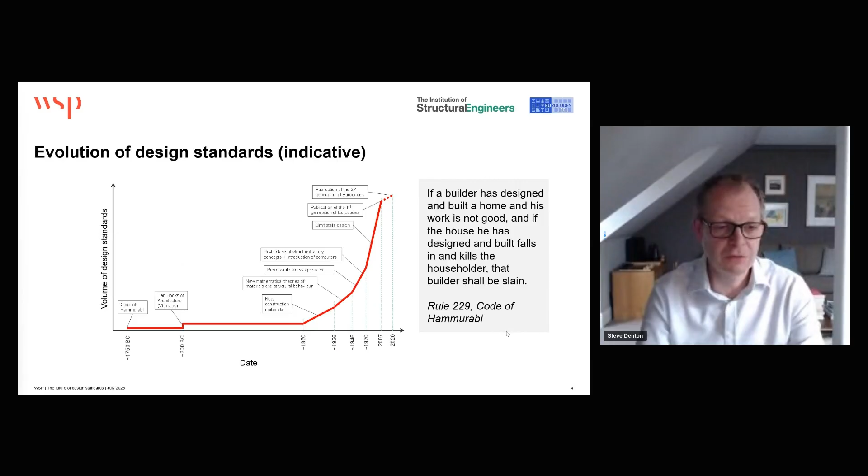It always fascinates me when we look back over the years that for people involved in standardization work, it's intriguing to see that even 4,000 years ago, they were writing performance-based requirements. And for those involved in contract negotiations, it's interesting that even in those days they wrote contracts with pain-gain mechanisms, albeit they focused on the pain side back then.

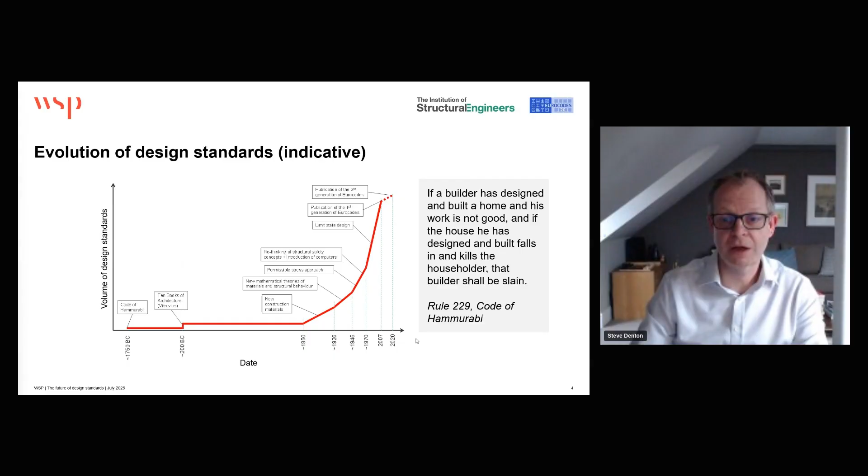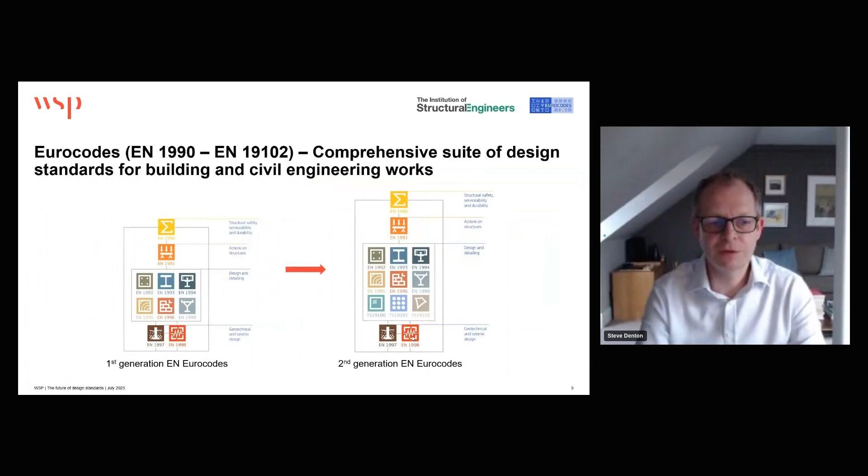But what I'm going to focus on today, and the examples I'm going to draw, are more from the Eurocodes. I'm going to talk specifically about some of the things we've learned and observed through the transition and development of the second generation Eurocodes, work I've been involved in for many, many years, and that I've been leading since 2013 as chair of CEN TC250.

I always remember, when I think around this topic of simplification, a decision which I drafted at a meeting. I remember sitting in a meeting room in Helsinki overlooking the harbour back in 2010, discussing as CEN TC250, the committee with overall responsibility for the Eurocodes, questions around simplification in standards. So while this topic has been meaningful in the broader debate around standards, it's also been specifically something we've been mindful of in developing the second generation Eurocodes, and we started thinking about what it meant to us as far back as June 2010.

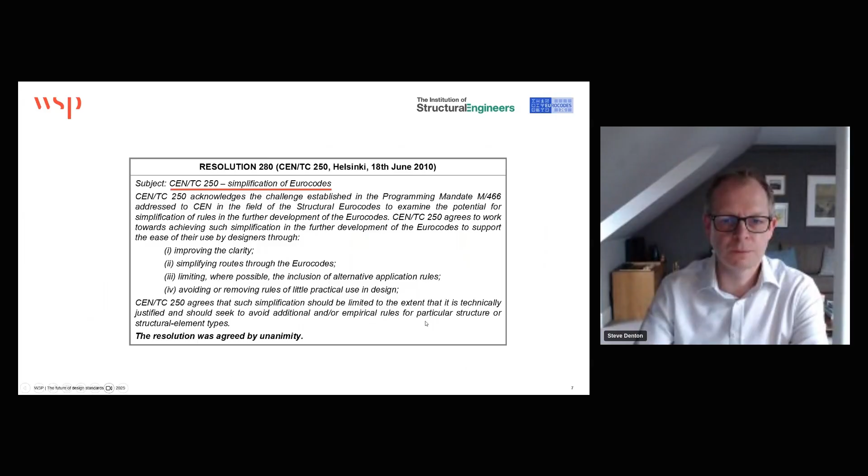Now, if I'm listening to someone speak and listening to their viewpoint, I'm always interested in where their viewpoint is from, where are they coming from. So I thought I'd give you a little bit of my background before we get into the main meat of the presentation.

As Jane said, my day job is as managing director for the Civil Intelligent Infrastructure and Roads units within WSP in the UK. But I actually spend a significant proportion of my time involved directly in projects, and have the opportunity to work on some really exciting and technically extremely complex projects. I combine that role with the work I do leading TC250 and the evolution of the structural Eurocodes, but also being Vice President of the Royal Academy of Engineering, held a visiting chair at the University of Bath for many years, and also worked as an advisor to clients and governments, both domestically and internationally.

And so I've tried to bring all of those different perspectives to the work I've done in leading the development of standards. But central to that, my day job, what I do most of my time, is as a practitioner, and that is the primary perspective that I bring to the standardization work that I do.

So in terms of this talk, I've split it into seven parts, but there's kind of three blocks. The first three parts are really just exploring the concept around standards and simplification and where we've got to, and some observations on the work that I've been doing over recent decades. Then the second block is really looking forward - what are my recommendations for how we should be considering and developing design standards in the future? And then finally, some brief conclusions at the end.

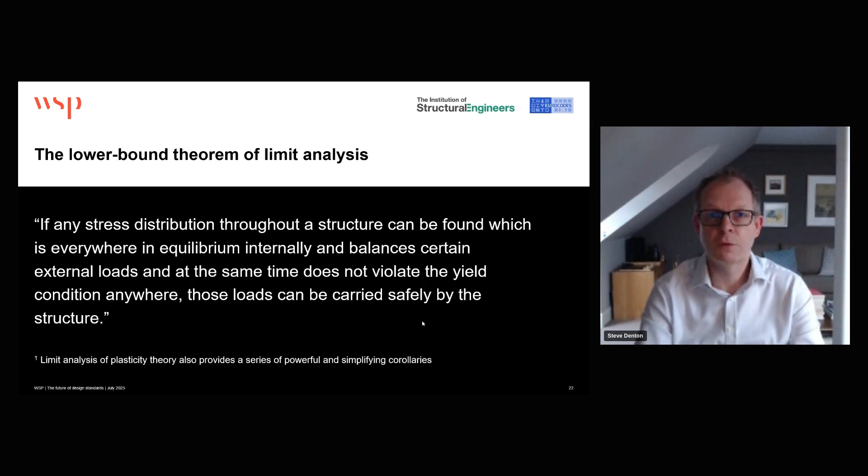But all theorems have or rely upon underlying assumptions. So if we're relying upon this theorem day to day, do we know what those underlying assumptions are? Well, there are four, and at least two of them are really important to know.

The first is that displacements are small, meaning they can be reasonably neglected in the equilibrium equations. So the first is small displacements, and the second is that materials are ductile, or have sufficient deformation capacity, which essentially means the size and position of the yield surface is fixed.

The other two assumptions can often apply, but probably we don't need to worry about them so much: the yield surface being convex, and a thing called the normality condition applying. But those first two should absolutely be in our consciousness - that displacements are small and materials are ductile.

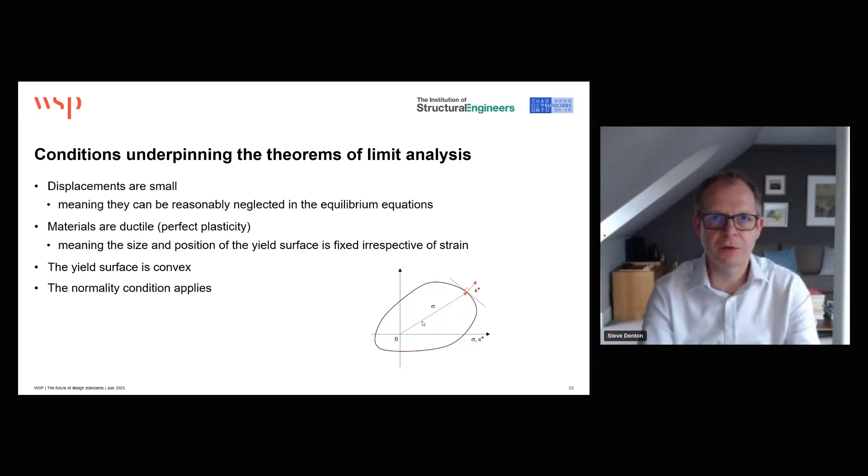So if I'm talking about standards and simplification, why have I taken this detour into this basic fundamental structural theory? Let me demonstrate why.

I've drawn in this talk, and I will again, a number of examples from the second generation draft of EN 1992, the standard for the design of concrete structures. And I've just extracted a clause from it here.

And this clause says the effects of restrained imposed deformations may be neglected at ultimate limit state. That's really convenient. Yeah, that's really convenient.

Now, what do we know about restrained imposed deformations? It's that they generate self-equilibrating stress systems. So we can neglect them at ultimate limit state according to the lower bound theorem of limit analysis.

But you'll see if you read on, this clause says: where it can be demonstrated or has been shown by experience with similar structures that - so what are those conditions? Those conditions are, firstly, that there's sufficient deformation capacity or ductility. And the second is that the structure is not sensitive to second order effects caused by large displacements, i.e. that we're looking at a small displacement situation.

So you'll see here that those conditions around being able to neglect the effects of restrained imposed deformations link directly to the assumptions that underpin the lower bound theorem of plasticity or limit analysis. And if those assumptions don't apply, then we have to go elsewhere for much more detailed analysis.

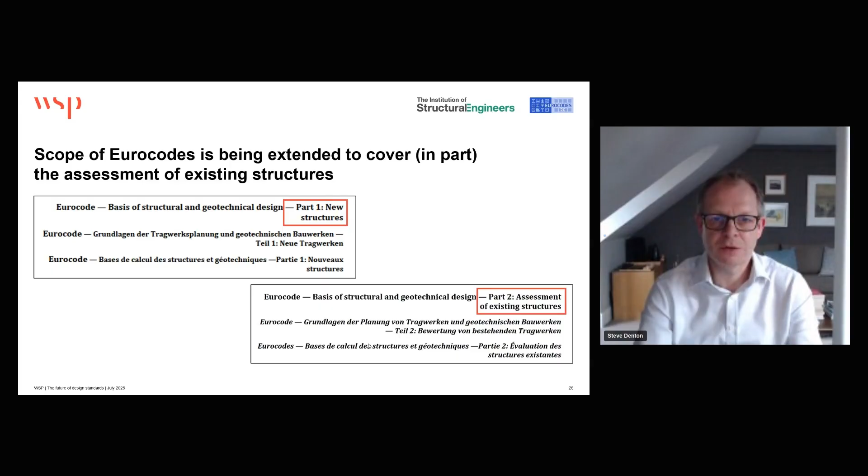These standards are being developed under the responsibility of CEN TC250, which is a committee where we have a series of subcommittees that take responsibility for each of the Eurocode parts, and then a number of horizontal groups and working groups and other groups to oversee the combined effort and try to ensure alignment between the activities at the subcommittee level.

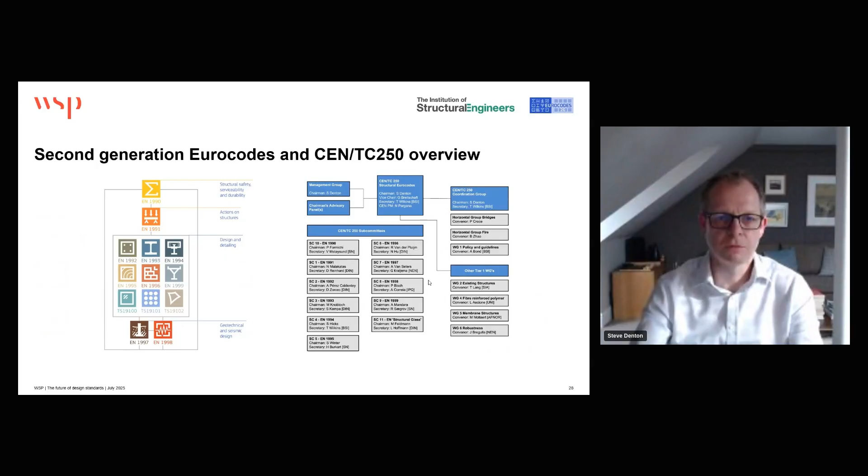An important thing to acknowledge in the development of the Eurocodes is that the Eurocodes are design standards, but they operate as a system in combination with other European product and execution standards. That's really fundamental to the way in which the Eurocodes are developed and their role within this wider system and family of standards.

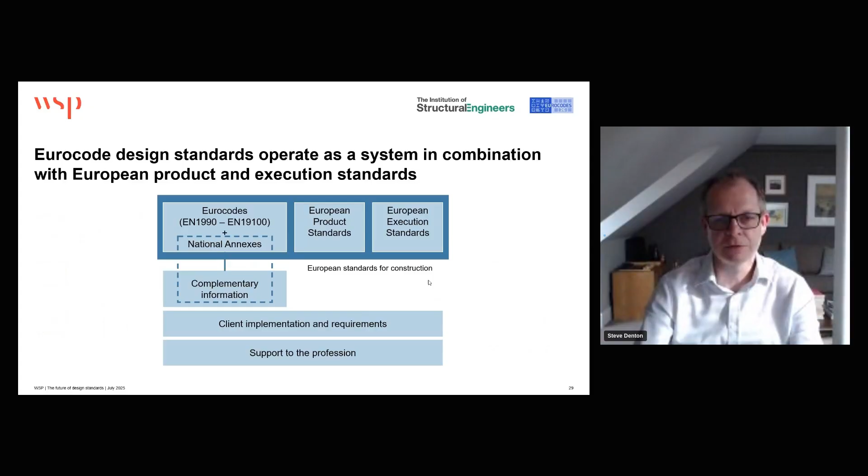Now, in the evolution of the Eurocodes, a really important stimulus, one that opened really important opportunities for us, particularly in relation to funding and support from the European Commission, was a thing called Mandate 515. These days, it would be referred to as a standardization request.

This is when the Commission wrote to CEN, setting out aspirations for how they would like to see the second generation of the Eurocodes developed. As TC250, we brought together around 1,000 experts that contributed to developing our response to that mandate document, setting out how we intended to respond to those changes and aspirations within Mandate M515.

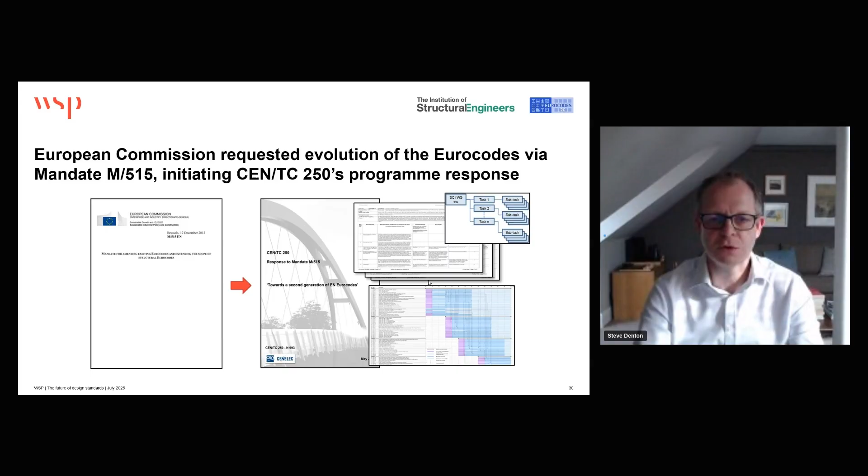One other thing worth sharing about the evolution of the Eurocode is that while Mandate M515 provided a top-down strategic direction, in the early stages we also invited systematic review and feedback from the 34 European countries that are members of CEN, on a clause-by-clause basis, but also on a more holistic basis, for every single one of the 58 Eurocode parts in the first generation.

We received thousands and thousands of comments, and all of those were catalogued and responded to, and those that we chose to act upon were then built into the evolution program for the Eurocodes.

Just to give a flavor of some headlines around the evolution program and its scale, when I last counted, a few months ago, there were 129 active subcommittees, working groups, and task groups within the TC250 family.

I mentioned earlier that the Eurocodes operate in conjunction with other product and execution standards. Those are under the responsibility of other technical committees, so we have 46 active liaisons with other technical committees.

We formed 76 funded international project teams through international competition across the 4 phases of our work program. We've followed all the CEN rules around opportunities for comment through inquiry and formal vote, but we also wanted a more inclusive effort, with more than 300 formal opportunities where we reached out to CEN members and sought comment on preliminary and more detailed drafts of the standards.

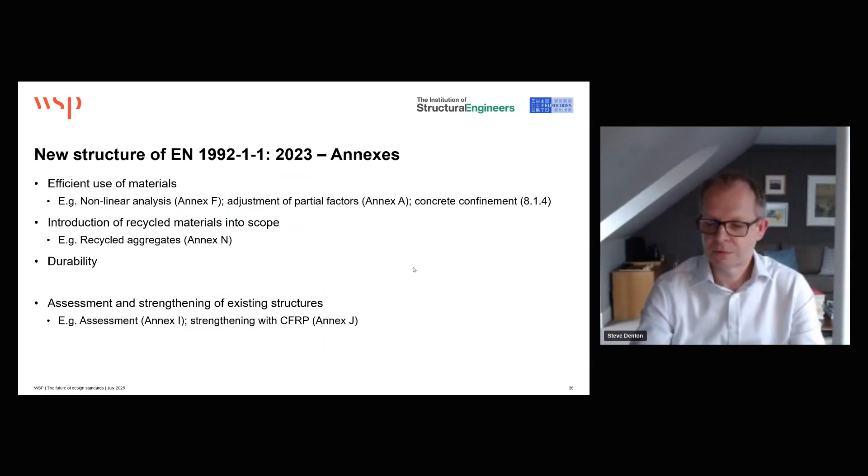Well, again, let's look at a clause. In EN 1992, in the section on methods of analysis, there's this clause around linear elastic analysis, a really convenient and helpful clause: except where specified otherwise. We'll come on to that in a minute. Linear elastic analysis may be carried out for the determination of action effects, assuming uncracked section properties, linear stress-strain relationships, and a mean value of the modulus of elasticity.

That's an incredibly convenient clause. It's particularly convenient that the code says it's fine to use uncracked cross sections, because at the time you're doing your initial analysis of action effects, of load effects, you don't know what reinforcement you've got in your structure. So the fact that you can work based on uncracked cross sections is incredibly useful. It's a really lovely simplification.

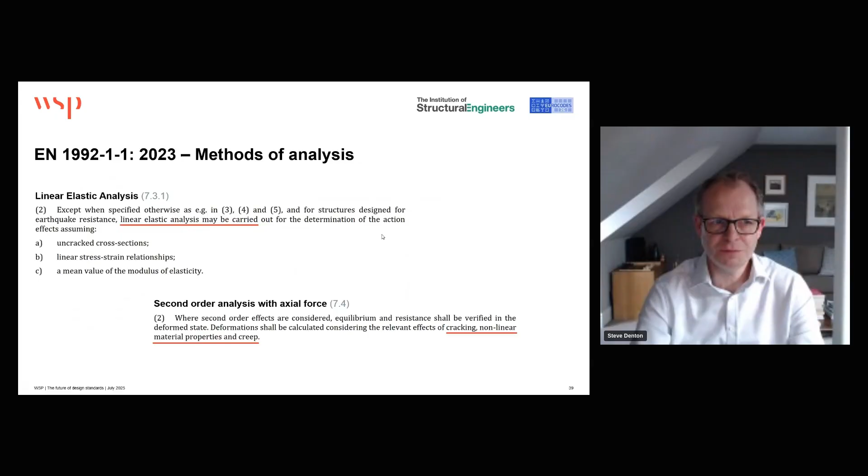So I want to return to this quote: like life in general, our codes seem to get more and more complicated. I imagine when you read that, and if you agreed with it, and those nodding heads that I often see in rooms full of people when I talk about this subject, then you would have seen that word 'complicated' pejoratively, as a negative. And I think we should challenge ourselves on that point.

We're professional engineers. We are responsible for the design and analysis and management of much of our built environment, of our infrastructure. We are equipped to be able to undertake really complex tasks, and we need to sometimes. It's part of what we are capable of doing professionally.

I feel like we should wear our ability to undertake complex analysis, where it's merited, as a mark of honor, not some kind of badge of shame. Why should we feel like we need to simplify or avoid doing complex things where it's appropriate to do it? And where it's relevant and appropriate, don't we need our standards to include the coverage of those things which are just inherently complex, because what we're dealing with is complicated?

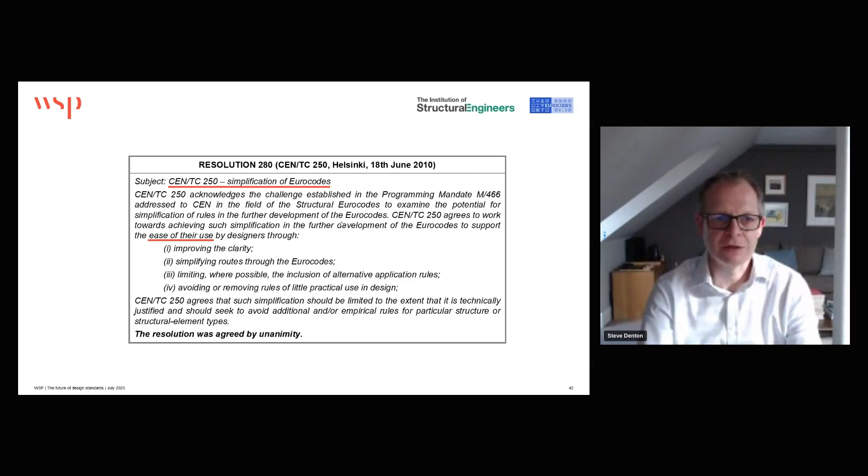I think it's really important that we accept that some of the things we do as structural engineers will be complicated. But that's not a reason why our standards need to be more difficult to use than they need to be. They don't need to be more complex or cumbersome than they need to be. We can embrace the fact that some of the things we do are inherently complex and still have a real driving desire to achieve ease of use in our standards.

And when we embarked on the evolution of the Eurocodes, as TC250, we set ourselves two key overarching aims that have guided all of the work we've done on the development of the second generation Eurocodes. The first of these was to enhance ease of use, and the second was to try and achieve exemplary levels of international consensus.

Now, we didn't just set that ambition to enhance ease of use, but we thought really deeply about what that meant and how we could go about it. One of the first things I did when I became chair of TC250 was establish an international panel, 16 people, to really unpack and understand what we meant by ease of use, what that objective really means. That team developed a paper that was unanimously endorsed by the 34 CEN members.

It included this statement of vision about the second generation of the Eurocodes being a more user-orientated suite of design standards that are recognized and most trusted and preferred in the world. That set a vision, but we also thought hard about the mechanics of how we go about it. How do we make this happen?

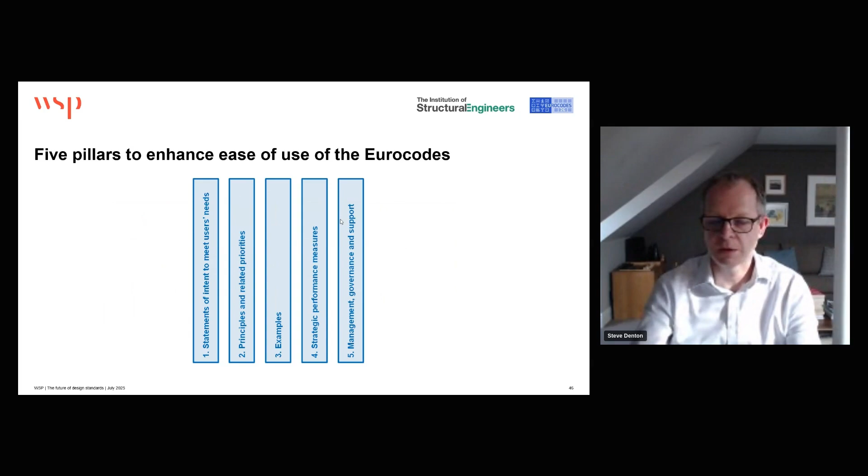And we recognized 5 pillars that we felt were fundamental to doing this: statements of intent to meet users' needs, principles and related priorities, examples, strategic performance measures, and then putting in place the right arrangement for management, governance, and support. I'll come back and talk about these things over the next few slides.

Now, when you have got thousands of people all working together to draft a common suite of standards, it's absolutely critical that everyone has an understanding of who your primary target audience is. I think it's true whenever you write anything to think, who am I writing this for? So one of the first ease of use decisions we took was to say, who are we writing the Eurocodes for? We settled on this: our primary target audience were practitioners, competent engineers, defined as competent civil, structural, and geotechnical engineers, typically qualified professionals able to work independently in relevant fields.

But we absolutely recognize that whilst that was our primary audience, the Eurocodes were used by many other groups. So we set out from the start a series of statements of intent for each of those categories of Eurocodes users. For our primary target audience, our statement of intent was to aim to produce standards that are suitable and clear for all common design cases without demanding disproportionate levels of effort to apply them.

For expert specialists, we aim not to restrict innovation by providing freedom to experts to apply their specialist knowledge and expertise, and I'll come back to that later. For educators, aiming to use consistent underlying technical principles irrespective of the intended use of a structure. For regulators, to produce standards that can be referenced or quoted in national regulations.

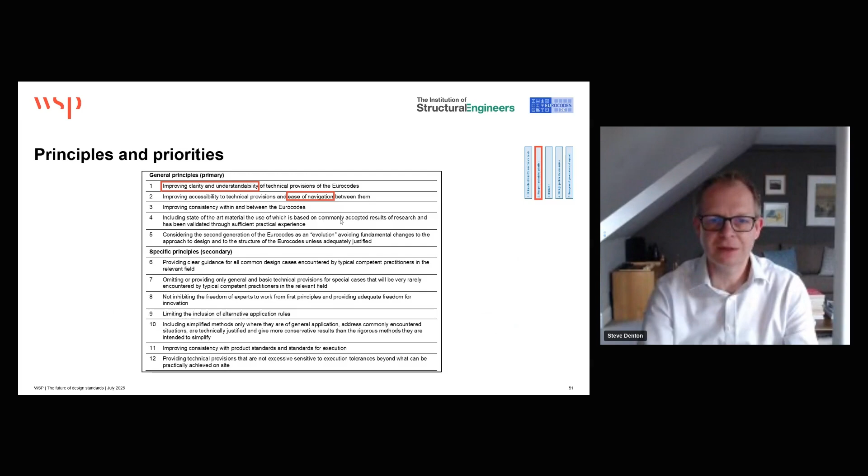In terms of guidance, management, support, and measurement, there are a number of innovations that we brought into the Eurocode Evolution program that were novel in the international standardization world. Through international competition and funding from the Commission, we appointed a technical reviewer to make sure we were following the ease of use principles we had set out, translating these into specific guidance and recommendations for all those involved in drafting, and then reviewing all the drafts produced to check for alignment with the rules and principles we had set out.

One of the challenges when working on a standardization effort of this scale is that at any point in time, the focus of individuals in a team will typically be on a subsection, a series of clauses, a particular block of text within a particular standard. But as users of standards, what you use is actually a suite of standards. You will be using multiple documents. What matters to you is that there's consistency across the suite, so similar expressions are used, and things are framed and phrased in similar ways, so you're not questioning yourself about why there might be a slightly different phraseology between one standard and another.

That's the kind of thing we have sought to drive through with the guidance and the management, support, and measurement that we've put in place.

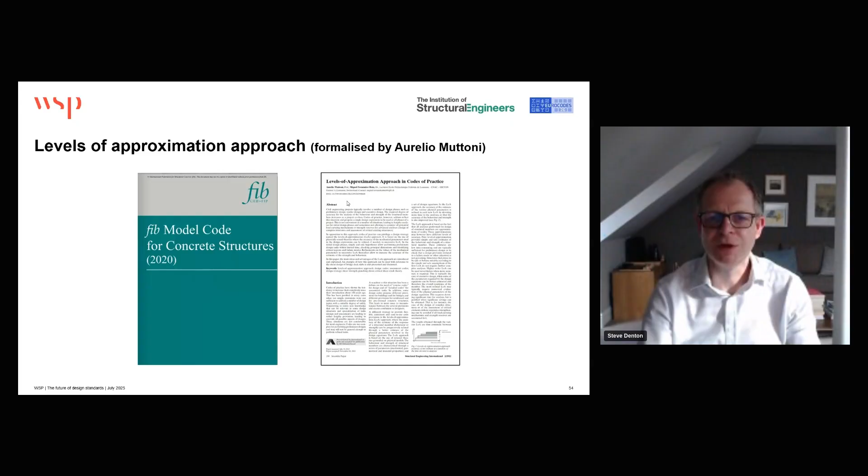What Aurelio Muttoni has done with co-workers is really formalize this approach into what he refers to as the level of approximation approach, and this is embraced within the FIB Model Code, with a number of papers that Aurelio has produced. I really like this. We've embraced some of these concepts within the second generation Eurocodes implicitly, but not explicitly in the manner it's been done within the FIB Model Code. The concept here is really to recognize that we can undertake analysis with varying levels of accuracy.

As we get to, or if we use those more sophisticated methods of analysis, those higher levels of approximation, it takes more time. But what's the payoff?

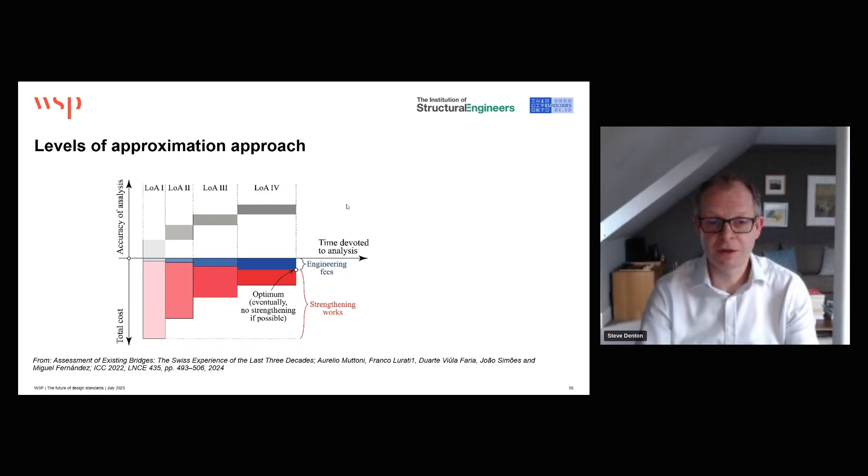Again, what Aurelio talks to is the payoff actually in terms of cost. If, for example, we were looking at designing strengthening works for a structure, and if we use the more simplistic levels of approximation, then whilst the engineering fees might be low, you'd end up having a much higher amount of strengthening works, and therefore the overall costs go up. And actually, as you move to the more accurate levels of approximation, those minimize or hopefully eliminate the need for strengthening works. So whilst the engineering fees may go up somewhat, the overall costs are a minimum.

And there's something I like around this formulation. Firstly, I like the transparency. In terms of the conversations that we have with designers and checkers or with clients, I like the transparency of this concept so that it can be agreed at the outset, if we're commissioned to undertake a piece of work, at what level we're going to be operating.

And what's also really nice in some of the examples that Aurelio and his co-workers have developed is where we actually have mechanical consistency between the different levels of approximation, and really what changes is refinement upon the mechanical parameters that feed in.

I think there are concepts here that can be developed further as well. It's not so explicit in some of the work that Aurelio presents, although when I've spoken to him about it, he assures me it's in there. At some of the lower levels of approximation, those are only valid with certain bounded restrictions on scope of application. And so sometimes you have to progress into the higher levels of approximation because of the constraints, the boundary conditions, if you like, to the applicability of some simplified methods. And I think there's room there for some of these concepts to be teased out a little further.

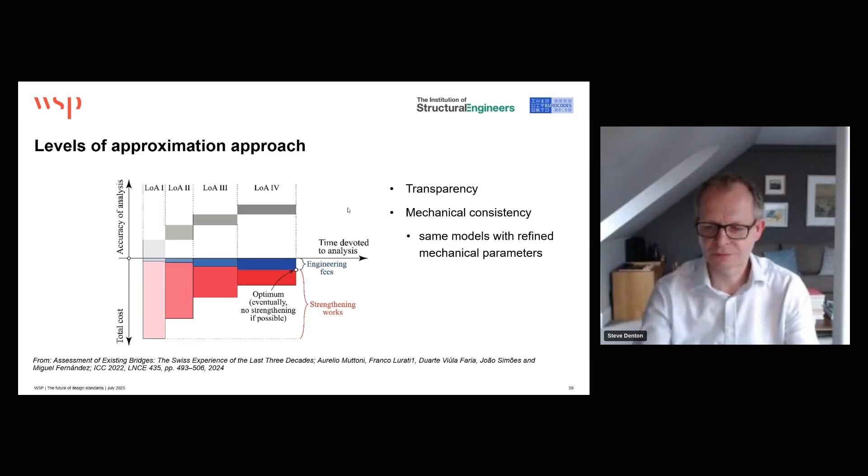And then my third thought around the future of design standards is actually about how we use them. Now, I really like libraries. One of the strongest things I took away from doing a PhD was a sense that whatever topic I'm looking at, whatever I'm working on, there's every likelihood that someone significantly smarter than me will have spent significantly more time than I'll ever probably be able to thinking about the issue that I'm exploring. And they will have written that down. My starting point should always be to build upon what work people have done in the past.

And I love having that. I think whenever you're in libraries, or the bookshelves I have behind me, it just reminds me of the importance of making sure that we capitalize on the huge repository of knowledge that is available to us.

Yet actually the way in which we currently think about standards is really akin to, what are PDFs? They're a kind of digital paper, aren't they? But we're not thinking about the way in which we consume standards in a truly digital sense. And that needs to transform.

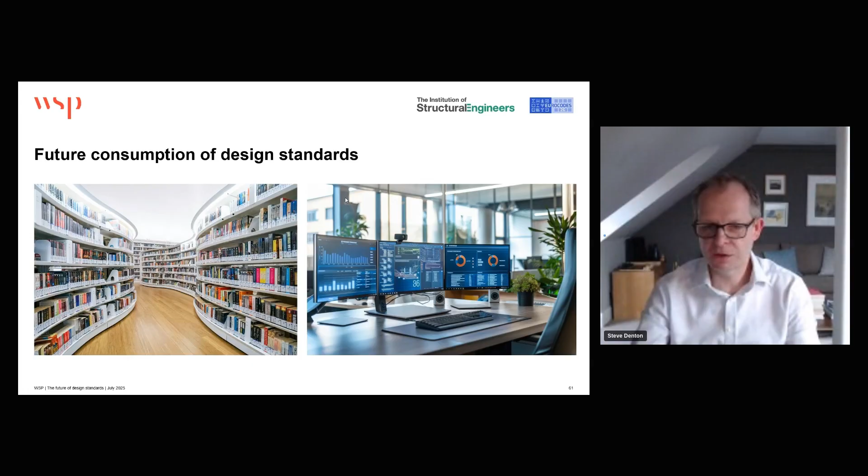And I know just what's possible because we had the opportunity and the privilege to work with National Highways over many years, supporting them with the development, the digital transformation of the DMRB initially, and now the MCHW. And National Highways had a really bold vision. I think they've done internationally leading work in this area to completely digitally transform the way in which their standards are developed and the way in which they are accessed.

And this has included tools, a whole platform within which the standards are drafted, which automatically includes within it the drafting rules so that issues are picked up in real time when you're drafting, which generates huge efficiencies actually. But also all of the comments and all of the background notes during drafting are also housed within this same platform. And I think that is immensely powerful and helpful and really an exemplar of how things can and should be done in the future.

And the benefits of this for National Highways were really considerable.

Here are just a few of the metrics: a 70% reduction in the cost of drafting documents through online collaborative working compared with past practices, and an 80% reduction in the time taken to draft new documents. The savings of the program of work within National Highways were measured in the millions just in terms of the cost of doing the updating.

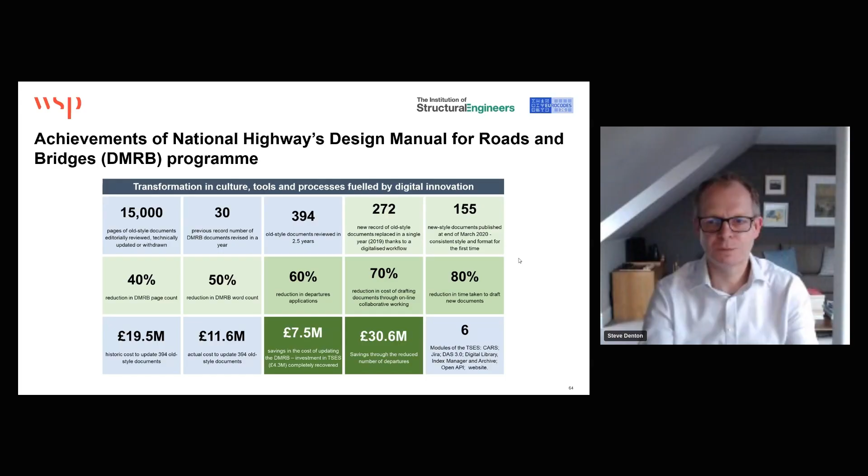So that then just takes me through to conclusions.

I hope what I've at least prompted you to think about a little bit in this talk is my view that simplified standards inhibit engineers, that they can have unaffordable sustainability impacts, because they could lead to, for example, inefficient use of materials when designing new structures, or unnecessary strengthening when assessing existing structures. As I said before, I think we should embrace our ability as structural engineers to tackle the complexity within the projects that we're dealing with as a badge of honor, not some mark of shame. We should recognize that sometimes our standards need to give us general and complex methods to deal with complex situations.

Although there's a but, and that but is that this does not mean we need to develop or accept unnecessarily complex or cumbersome standards. So what should we be doing to prevent our standards being unnecessarily complex or cumbersome? Well, I gave you my three thoughts. The first: focus on ease of use, not dumbing down.

Maybe learn from and embrace some of the things that we did in the second generation Eurocodes development, some of the things I shared with you today.

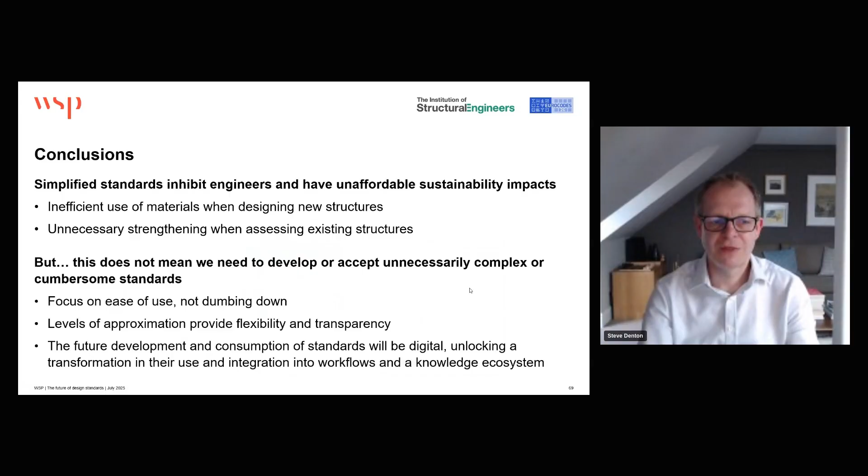And then finally, that recognition that the future development and consumption of standards will be digital. And that what we need to do when we think around the future of standardization is how can we unlock this transformation in their use and integrate standards into workflows and a wider knowledge ecosystem.